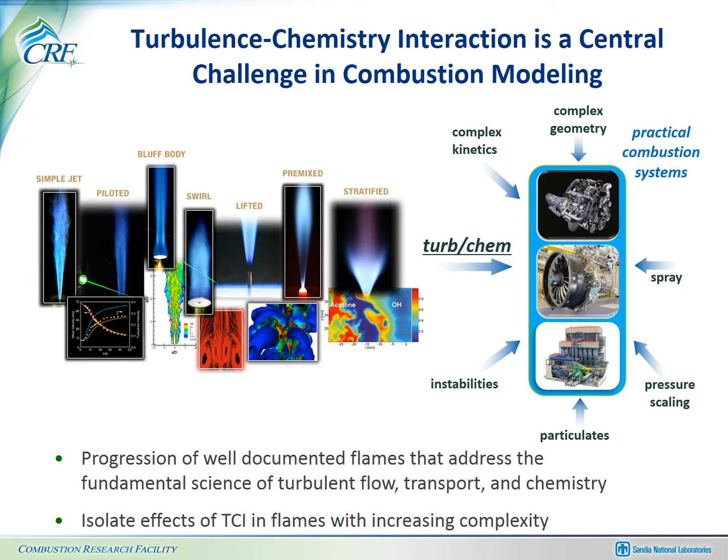I want to start by reminding you that I've never done any work on high pressure combustion, and most of the flames we work on don't really qualify as high Reynolds number, although we try to push the Reynolds number as high as practical in the lab. What we've done is focus on fundamentals of turbulence chemistry interaction in a progression of well-documented flames, looking at the coupling of turbulent flow, molecular transport, and chemistry, trying to isolate the effects of turbulence chemistry interaction in flames of increasing complexity.

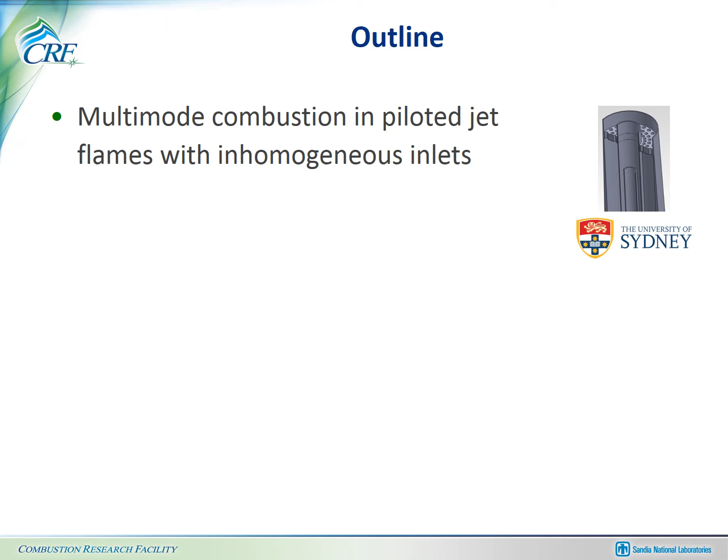In this talk, I'm going to tell you what we've done most recently to make our lives more complicated. The first part covers the investigation of multimode combustion in a piloted jet flame with inhomogeneous inlets. The interesting thing about this burner from Sydney is that within the near field there's a very rapid transition from a stratified premixed mode of combustion to diffusion type flame structure.

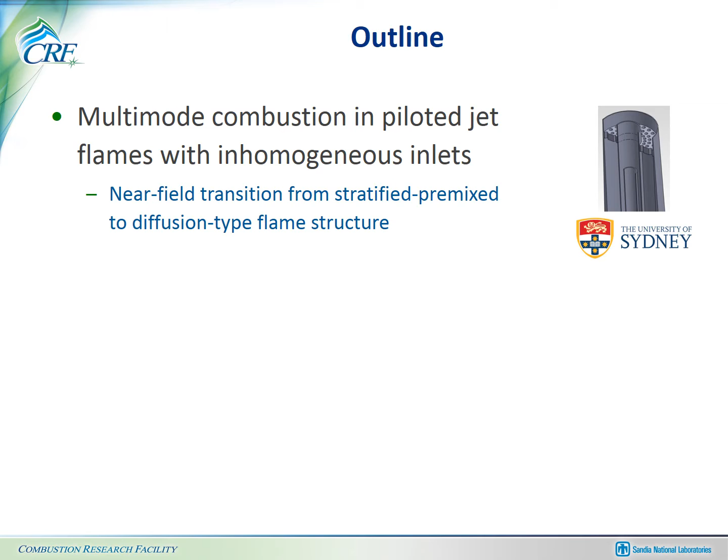The next part of the talk covers two different developments we've been working on in extending Raman scattering to less friendly flames and to a wider range of hydrocarbons. In the last part, I'll give a tip that may be useful for high pressure, high Reynolds number combustion: how to extract the fully resolved scalar variance from under-resolved measurements.

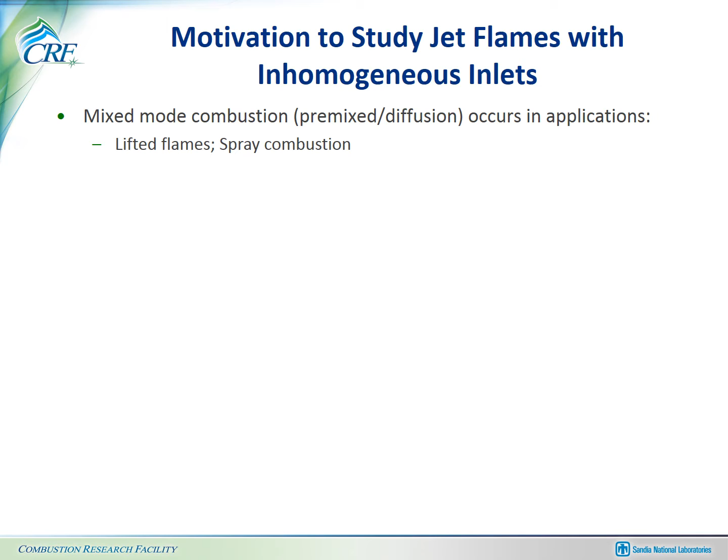The motivation to study these jet flames with inhomogeneous inlets is that mixed mode combustion - combustion with characteristics of both premixed and diffusion flames within the same combustor - occurs frequently in practical applications. Essentially anytime you have a lifted flame or spray combustion, it's partially premixed, and there's a mixed mode flame structure present. An example of a laboratory scale flame showing mixed mode combustion is the DLR model gas turbine combustor.

There's a nice paper from the last symposium from that group combining PIV measurements, OH PLIF in the red, and acetone PLIF in the blue, showing varying degrees of fuel-air mixing moving into the reaction zone in this flame.

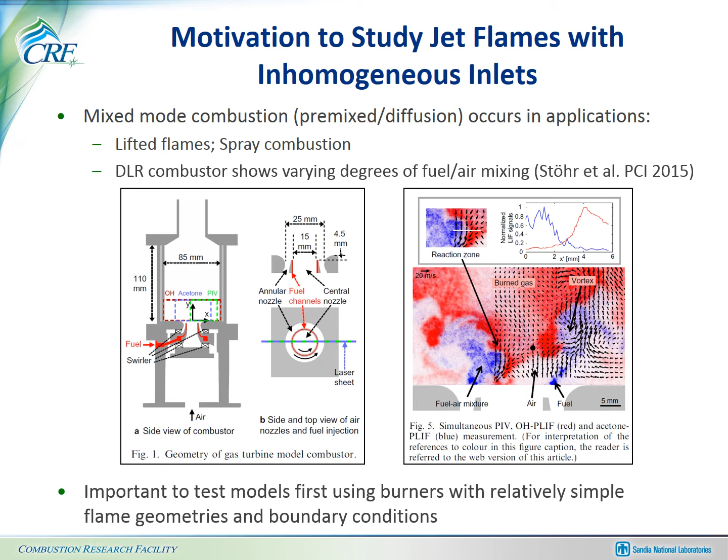The problem with this combustor for modeling is that the boundary conditions and flow field are rather complex. It's important to first test models using burners with relatively simple flame geometries and boundary conditions. This new piloted jet flame burner from Sydney University allows investigation of mixed mode combustion in a burner geometry that's relatively simple and familiar.

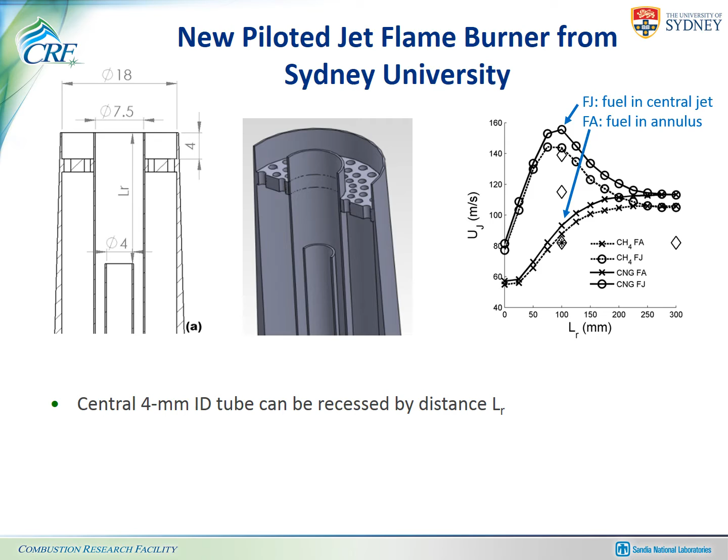What they've done is add a central 4mm inner diameter tube within the main tube that can be recessed by variable distance. The burner can be operated in two configurations: FJ refers to fuel coming through the central tube and air through the annulus, and FA refers to fuel coming through the annulus and air through the central tube.

When fuel is injected through the central tube, there can be an enhancement of flame stability by up to 40% in blow-off velocity if the recess distance is within an optimal range.

There's been quite a bit of work done and already published on a first series of flames with an air-to-fuel ratio of 2 and a stoichiometric pilot burning acetylene, hydrogen, and air, with an adiabatic flame temperature of 2480, significantly higher than methane air.

We've also done, and what I'll present today, is a series of measurements using a stoichiometric pilot with 5 gases to match both the composition and adiabatic equilibrium flame temperature of methane and air.

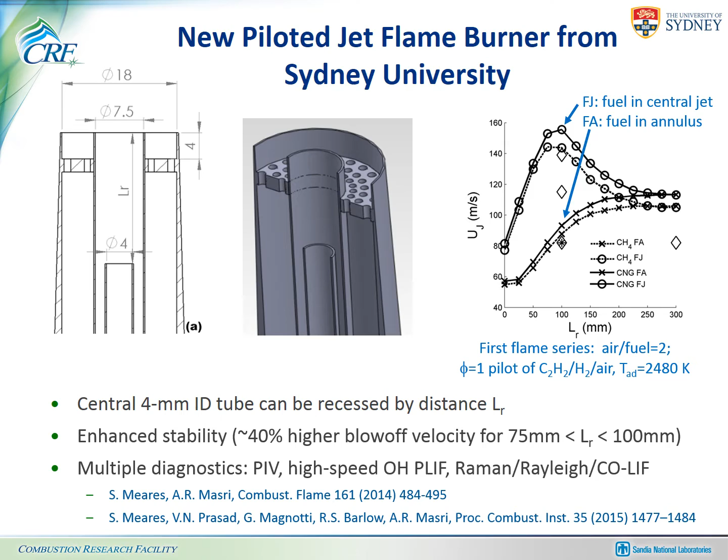But first, I want to remind you of the diagnostics we use. At Sandia, we combine line-imaged Raman scattering, Rayleigh scattering, and CO laser-induced fluorescence with cross-planar OH-LIF imaging. For the Raman and Rayleigh measurements, we combine beams from 4 lasers to deliver about 1.8 joules per pulse total energy.

That allows us to measure temperature and all the major species with good precision and spatial resolution on the order of 100 microns, along a 6 millimeter segment of the beam, letting us measure the state of mixing, progress of reaction, and also gradients in the measured scalars.

The OH cross-planar imaging allows us to determine the local flame normal direction, and from that we can estimate the 3D gradients and dissipation from the 1D measurement. I won't be reporting any information on these 3D measurements today—it'll all be just one-dimensional work.

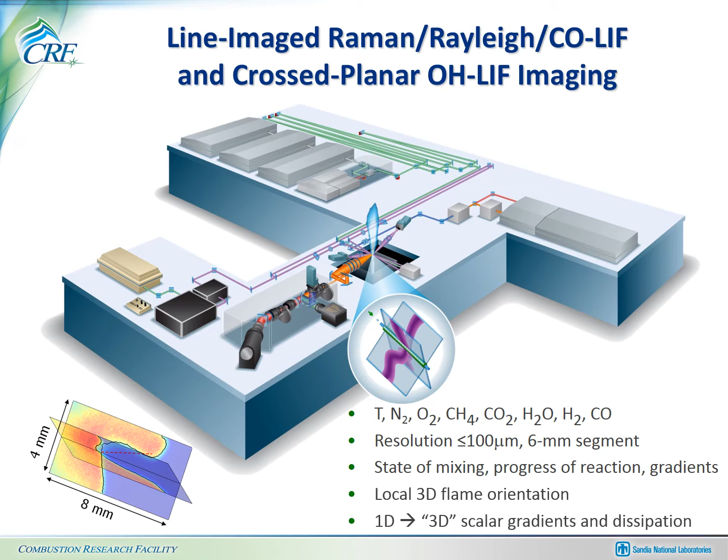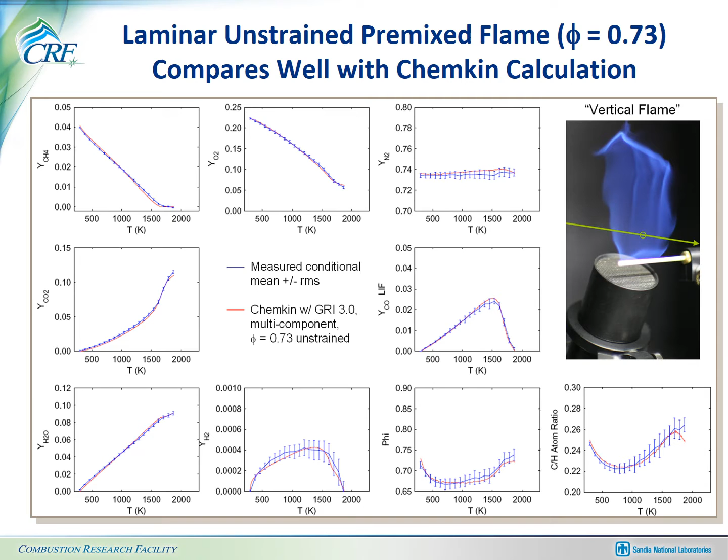When we go through all of our calibration procedures and then go back and measure a simple flame, we can demonstrate that we get very good results. This shows a comparison between Chemkin calculations of a freely propagating premixed flame and our measurements on our best approximation of that type of flame at equivalence ratio of 0.73.

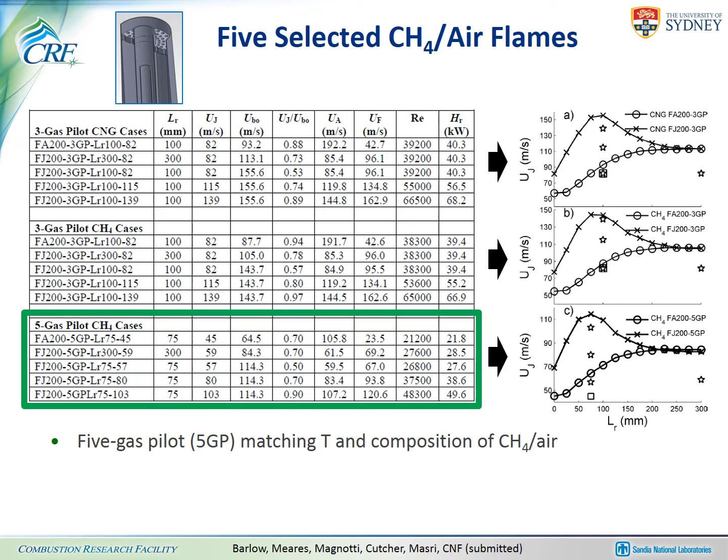This table lists all of the flame conditions that have been measured, including a set of natural gas flames that were used in Sydney, the methane flames that were run at Sandia using the same velocities as those natural gas flames, and both sets of those flames were done with the 3-gas pilot and high adiabatic flame temperature in the pilot. The last group is this 5-gas piloted series of flames measured at Sandia, and within that we have 3 inhomogeneous flames with the FJ configuration and a recess distance of 75 millimeters, at 50, 70, and 90 percent of blow off.

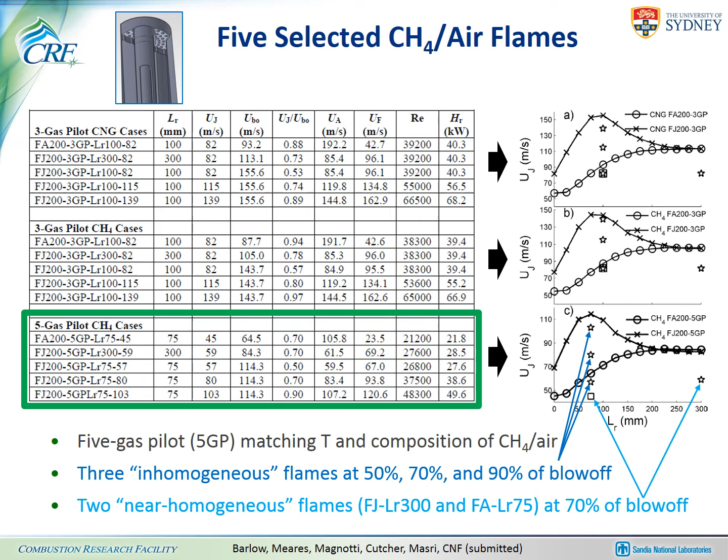There are 2 flames with the other configurations. One is FJ fuel in the central jet, but with a recess distance of 300 millimeters, and this essentially burns like the homogeneous flame. It's not completely homogeneous—there are some fluctuations in mixture fraction at the exit, so we call that near homogeneous. Then there's an FA configuration with a 75 millimeter recess distance, but because the air jet velocity is so high coming out of that small tube, there's very rapid mixing, and the mixture fraction is essentially flat or uniform at the exit, or very close to that. Both of those are at 70% of blow off.

Lots and lots of data. There's just been a large paper submitted to Combustion and Flame.

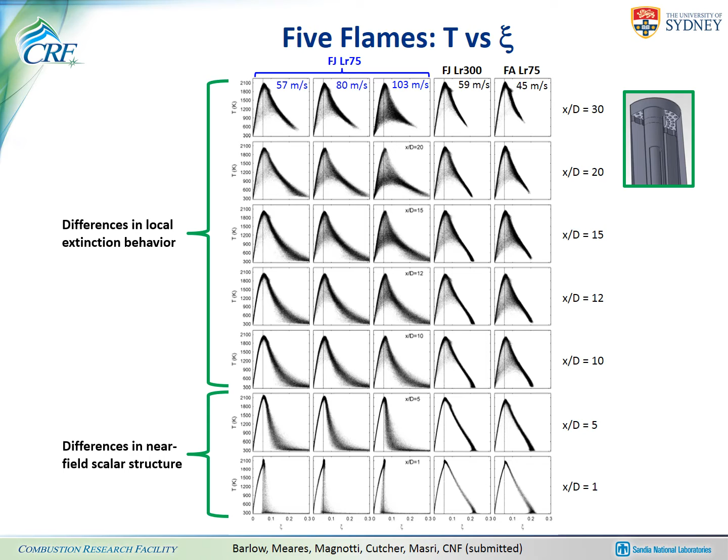In the downstream part, we have differences in the local extinction behavior, and further upstream we have differences in the near field scalar structure. What I want to do for this talk is focus on just 2 flames in the very near field and look at the differences and evolution of flame structure within those 2 flames.

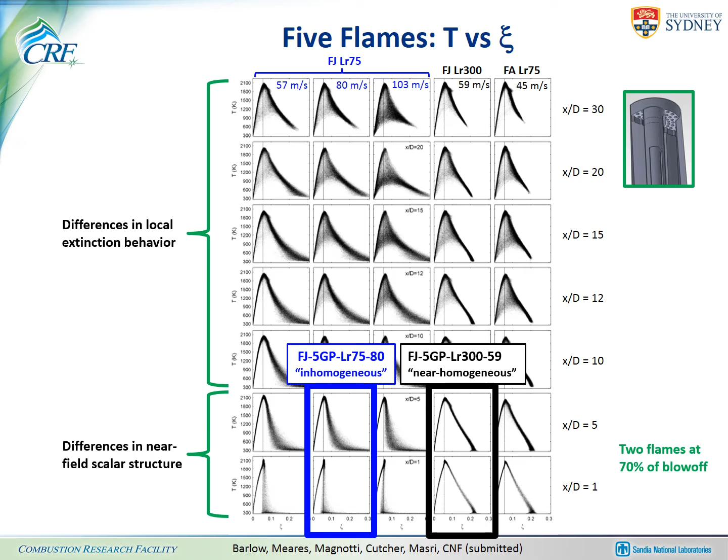These 2 flames are each at 70% of the blow-off velocity, and at 1 diameter downstream of the jet exit they have very similar profiles in temperature, and also very similar profiles in jet exit mean velocity and turbulence intensity once those profiles are normalized by the bulk jet velocity, which is 80 meters per second for the 75 millimeter recess distance case, and 59 meters per second for the 300 millimeter recess distance case.

But these 2 flames have very different exit profiles, or near exit profiles, in the mixture fraction, shown here at 1 diameter downstream. For mixture fraction, we're using Bilger's definition and defining unity as the condition with pure methane, so the stoichiometric mixture fraction is 0.055.

In the inhomogeneous case, we have a very peaked profile in the mean mixture fraction, whereas in the homogeneous case it's nearly flat. There is some asymmetry from side to side, and this is due to a slight offset in the centering of the central tube, which is difficult to center perfectly in these flames.

This asymmetry doesn't really affect our interpretation of the flame structure. The inhomogeneous flame also has minor asymmetry—you can see there's a slight dip to the leaner mixture fraction on the left side compared to the right side of the profile, but the symmetry is really pretty good.

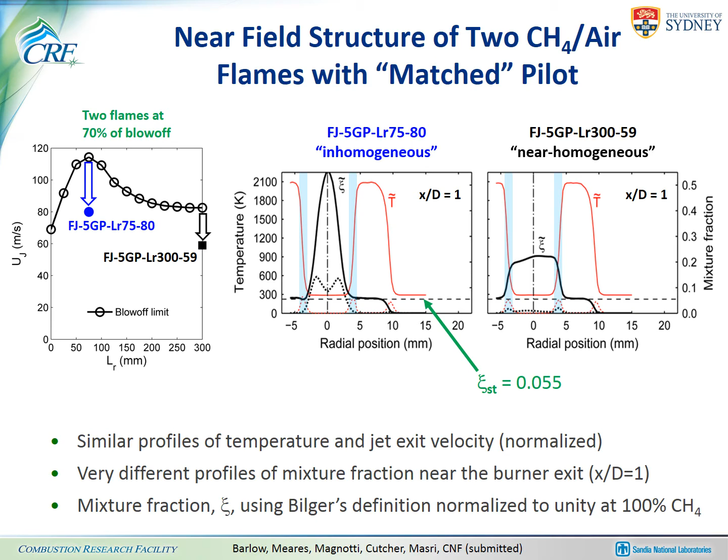Now let's go back to the scatter plots of temperature versus mixture fraction. The first thing I want to show you is that there are some points affected by fluorescence interference, but these are a small fraction of the samples, and fluorescence interference in these flames is a minor problem. What we really want to focus on is the change in mixture fraction across the reaction zone.

So the change in mixture fraction divided by change in temperature: in the inhomogeneous flame there's a nearly vertical trajectory. This looks like premixed combustion or stratified premixed combustion, and most of the data points are actually along the floor here, going up to quite high mixture fractions, all the way up to about 0.7 on an instantaneous basis.

Then for this near-homogeneous case, there's a somewhat smaller variation within the mixture fraction samples across the interior of the jet, the cold samples, and then even smaller fluctuations in the mixture fraction entering the flame zone and lifting off the temperature floor.

Then the dependence of temperature on mixture fraction is nearly linear, and that slope is about minus 10 to the minus fourth inverse Kelvin. As we go downstream, in the near-homogeneous case, the slope is essentially the same, looks really similar. In the inhomogeneous case, we're rapidly starting to pull into richer samples entering this reaction zone.

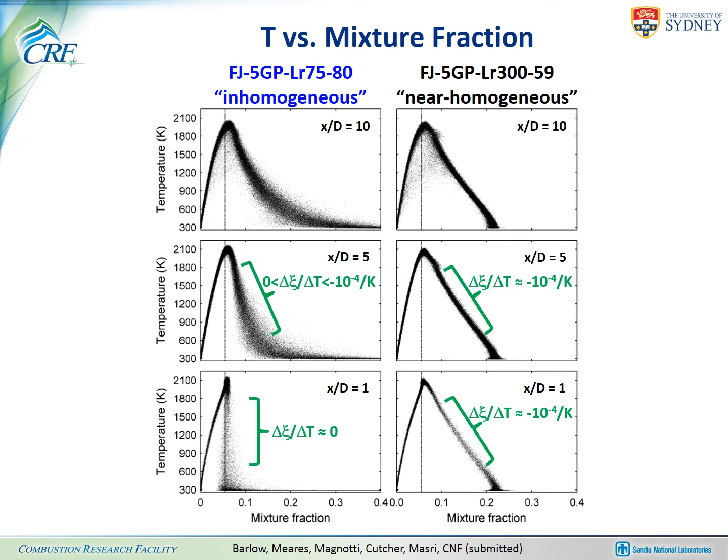Here we compare scatter plots of species mass fraction versus mixture fraction in the two flames, with samples color-coded for temperatures above 1400 Kelvin, so we can see what mixture fractions and samples are moving into the reaction zone. In the inhomogeneous case, the scatter plots reinforce the picture of a stratified premixed combustion mode going on with near-stoichiometric conditions, both lean and rich, moving toward the condition of the pilot.

If we move further downstream, we again see that there's a very rapid pulling away toward richer samples of the mixture fractions that are moving into the reaction zone.

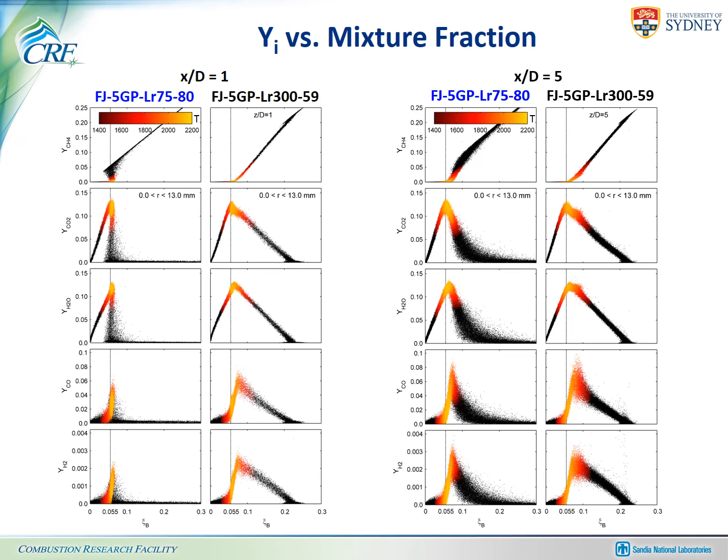Now what we want to do is isolate the flame structure on an instantaneous basis using our line measurements. Here we compare instantaneous temperature profiles from each of the two flames, 25 shots in each flame, and each profile has been shifted to align the center temperature of 1200 Kelvin at the origin.

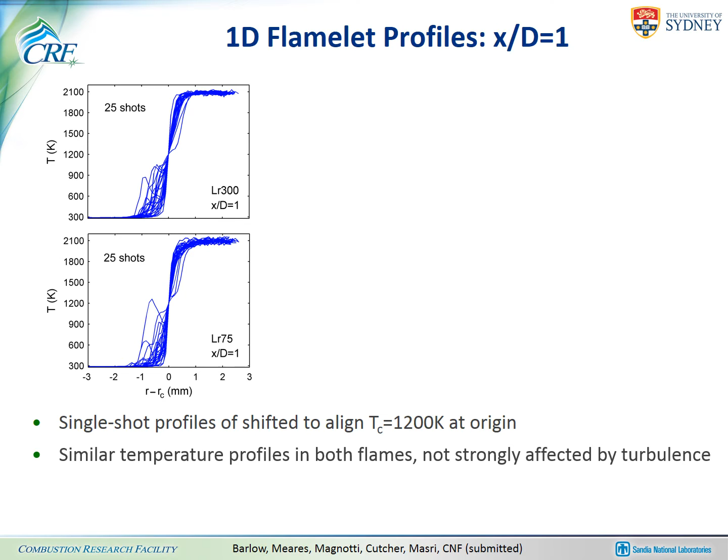What we find is that despite the large difference in mixture fraction profiles for these flames, the temperature profiles are quite similar. At this near-exit location, they're not very strongly affected by turbulence; the fluctuations are limited really to the cool half of the flame for the most part. These really look like flamelet-type profiles.

If we look at the mixture fraction, then in the near-homogeneous flame, there's a very strong correlation between mixture fraction and temperature going through the reaction zone, so aligning on temperature also aligns on mixture fraction, with a value in the center of the flame of about 0.13, outside the flammability limit.

Then looking at the inhomogeneous case, we find that in the center of the reaction zone there are fluctuations in mixture fraction, but those are all within the flammability limits. We see again that we've got samples coming from the lean side and from the rich side of stoichiometric, burning in a stratified combustion mode toward the stoichiometric or slightly higher than stoichiometric conditions as measured in the pilot.

We can also look at the scalar dissipation, and here we're just looking at the radial contribution to scalar dissipation. There's a caveat that we haven't measured the dissipation scales in the near field here, but based on previous work and similar flames, we expect that we're under-resolved, so we're only using these dissipation measurements for qualitative comparisons.

What we find is that in the near-homogeneous case, we have high dissipation in the middle of the reaction zone, and in the inhomogeneous case, we've confirmed that dissipation levels are very low within the reaction zone.

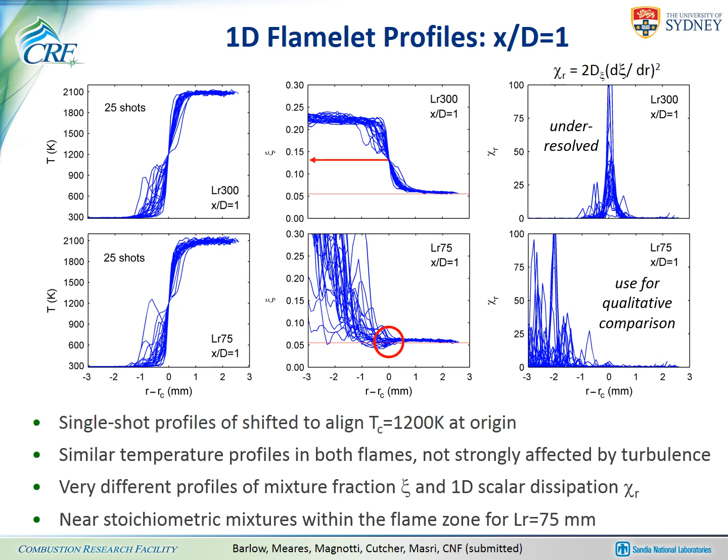The previous slide showed just 25 realizations from each flame, and here we're comparing histograms from 500 shots coming from each flame. We confirm that the mixture fraction at 1200 Kelvin in the middle of the reaction zone in the inhomogeneous case with the 75 millimeter recess distance is centered near the stoichiometric condition and has both lean and rich of that stoichiometric condition.

Whereas in the near homogeneous flame, the mixture fraction value in the middle of the reaction zone at 1200 Kelvin is too rich to burn.

Now let's look over at the scalar dissipation. Here we see a distribution in scalar dissipation that is high within the flame for the near homogeneous case, and very low dissipation for the inhomogeneous case. Essentially all of the samples, or nearly all of the samples, are in the smallest bin centered on 0.

Now what we want to do is look at the statistics of this flame structure metric that we mentioned in the scatter plots of temperature, which is the change in mixture fraction divided by the change in temperature. We're using this macroscopic measurement across 1000 Kelvin because measuring the local mixture fraction dissipation in a premixed flame is sort of beyond what we can really do with our precision and resolution in these measurements. So this is sort of a macroscopic metric of the combustion mode, or the flame structure.

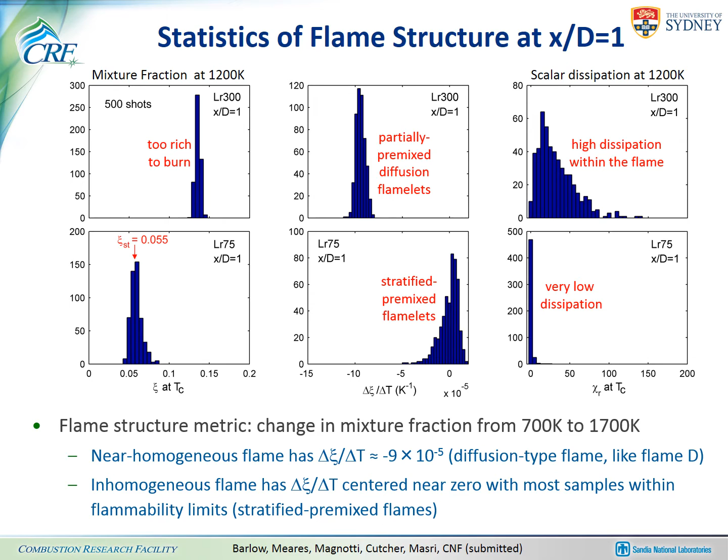Moving to 5 exit diameters downstream, there's obviously more turbulent fluctuation in these instantaneous profiles. The scalar dissipation in the near homogeneous case is significantly reduced already from what we saw at 1 diameter. And in the inhomogeneous flame, we're seeing a few intermittent high values of dissipation that correspond to these intermittent high gradients in the mixture fraction that's moving into the reaction zone.

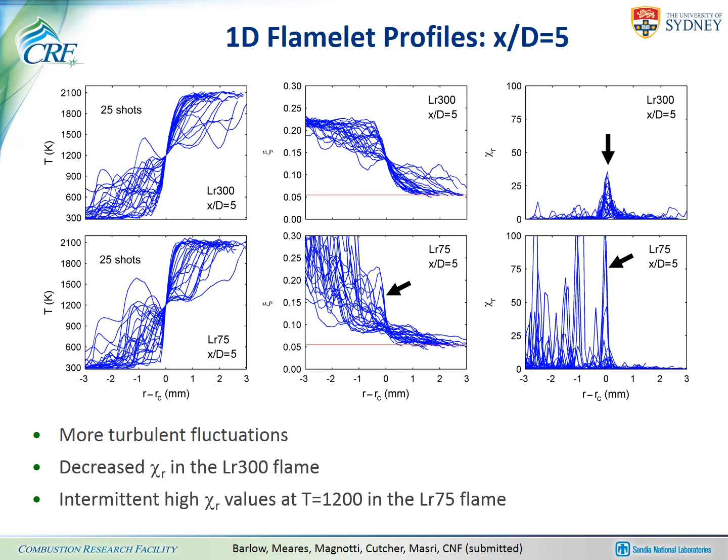The histograms at x over D of 5 show that there's essentially no change in the LR300 case in the mixture fraction at 1200 K. But there's been a shift in the mixture fraction in the LR75 case over to something that's at the edge of the rich flammability limit, about 0.095 or so equivalence ratio, or mixture fraction.

In terms of the scalar dissipation, we see that there's a lower dissipation in the LR300 case compared to that at x over D of 1. And in the LR75 flame, we're starting to see some high values, a few high values of the scalar dissipation.

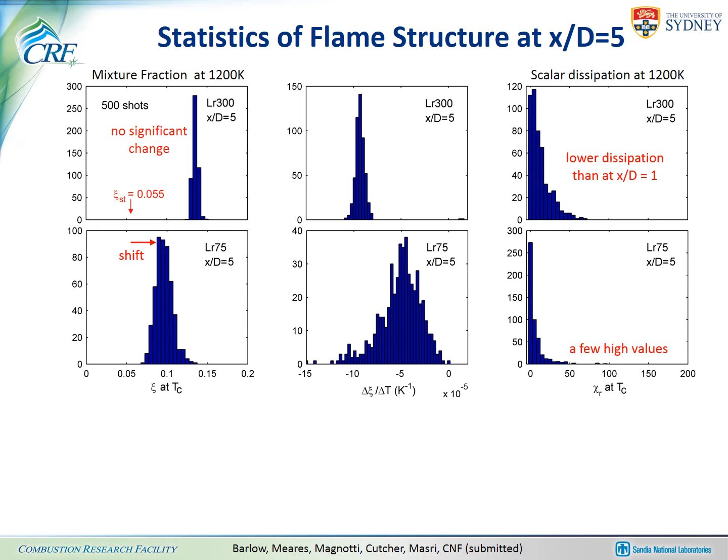Considering the flame structure metric, in the LR300 case, we're still dealing with the same values, or same range of values that correspond to partially premixed diffusion flamelets. But now we have, in the LR75 case, a very broad distribution that goes all the way from the 0 premixed value up to values, or in magnitude, that are larger than what we find in the homogeneous or near homogeneous flame.

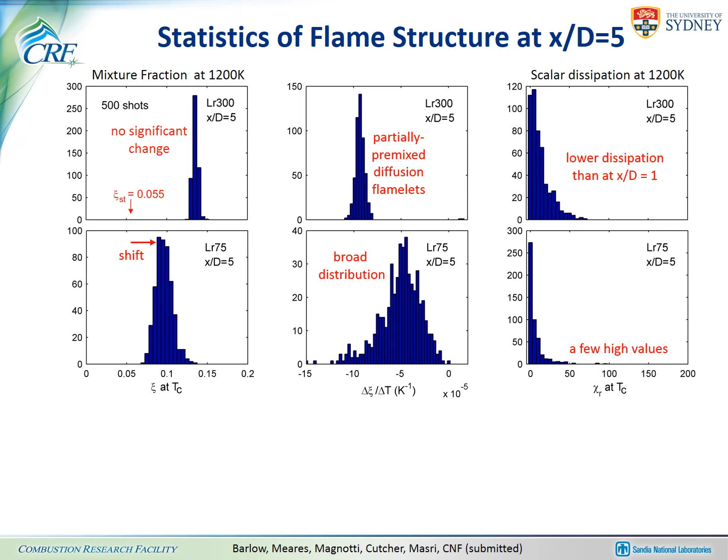So what we're seeing is that we're in the middle of a rapid transition from stratified premix mode of combustion toward a premixed or partially premixed diffusion mode of combustion in this LR75 flame.

What we want to do next is to look at how the flame structure changes as the magnitude of this flame structure metric increases. To do that, we're going to coarsely bin our realizations according to the measured flame structure metric for each realization. We're going to include data from the -R side of the flame, which, if you recall, has a slightly richer mean mixture fraction, and a slightly leaner mean mixture fraction, which will give us a bit more information at this end of the distribution.

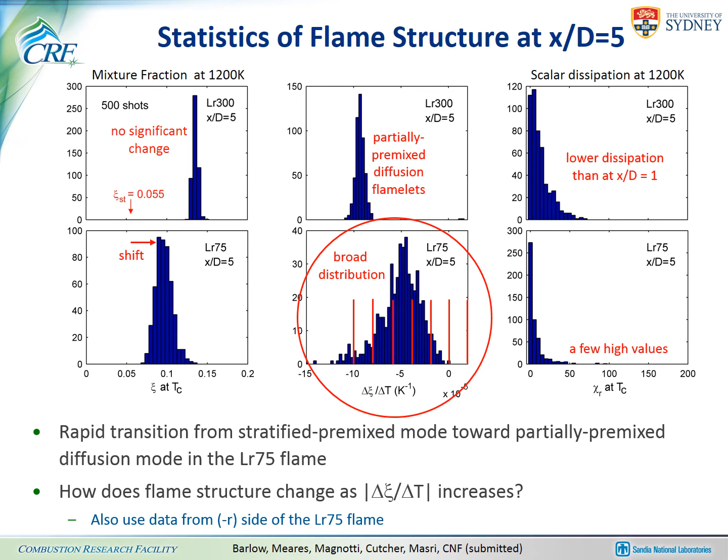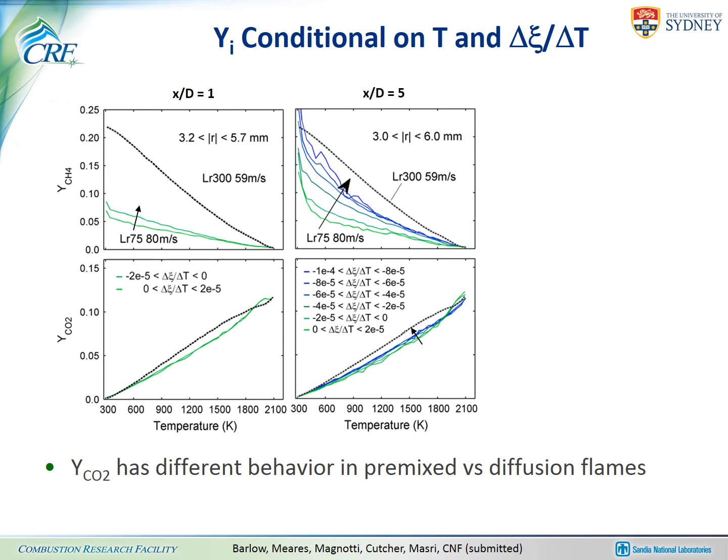At x/D = 5, we're sampling a much broader distribution of the flame structure metric, and what we see is that there's an evolution as we increase the magnitude of that metric, going from the premixed shape of the profile toward the partially premixed diffusion flame type of profile.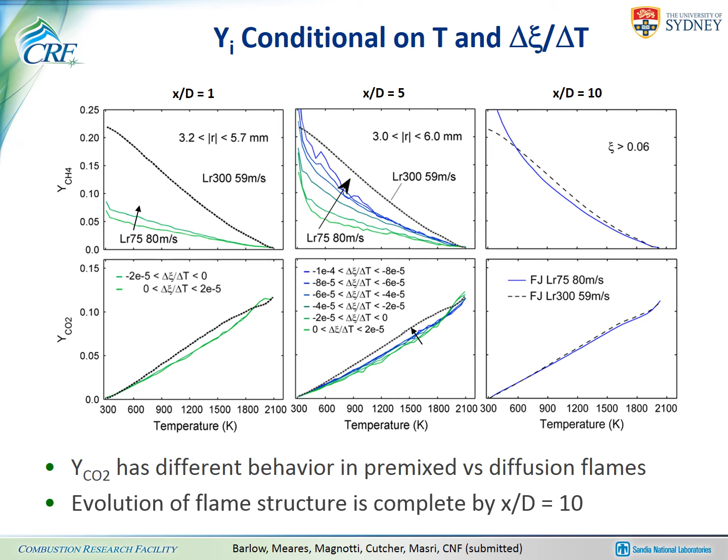As we move farther downstream to 10 diameters, the evolution in flame structure is essentially complete already by 10 diameters. The same sort of thing shows up in the results for water, CO, and hydrogen. In the premix type flame, there's a nearly linear correspondence between water mass fraction and temperature, whereas the curve is slightly concave downward for the diffusion type flame.

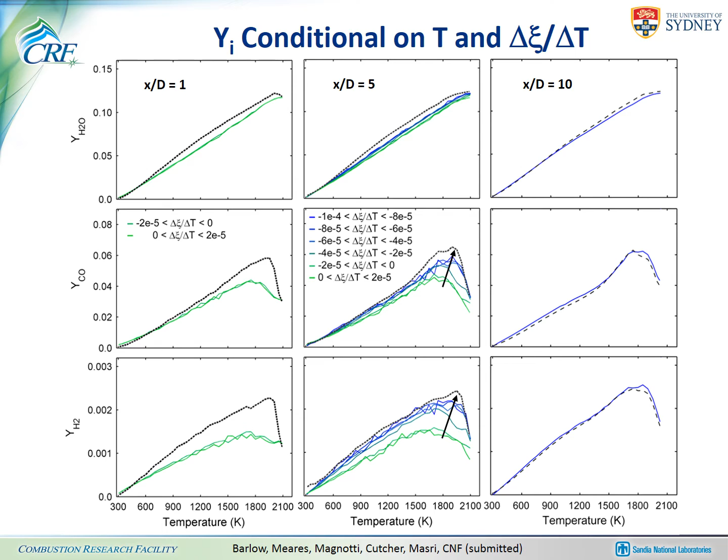As we move toward richer samples within the reaction zone, we go to higher values of the CO peak mass fraction. Again, as we go down to x over D of 10, these profiles are essentially the same, and the evolution in flame structure that happens in this LR75 flame is nearly complete.

We can gain some useful insights by considering strained laminar flame calculations. Sure, the turbulent flames are different—they're unsteady and in a high shear flow rather than an opposed flow—but still we can consider two configurations. One is flow against stoichiometric products, relevant in the near field before the pilot gases have been entrained. The other is flow against air, relevant after the pilot gases have been entrained and somewhat farther downstream from this near field region.

What we've done is vary the fuel side equivalence ratio and consider two strain rates, 100 inverse seconds and 300 inverse seconds. For the case with flow against stoichiometric products, we're limiting the profiles plotted here to temperatures below 2100 Kelvin.

This is similar to what we did with the turbulent flame data to eliminate the influence of the pilot gases on the profiles we're looking at. In the case with flow against air, we're limiting to conditions of mixture fraction greater than 0.05, so it's just the near-stoichiometric and rich conditions plotted here.

What we see is that as we increase the fuel side equivalence ratio in either of these configurations, there's a similar trend in the shape of the CO2 mass fraction profile versus temperature to that which we saw in the turbulent flames.

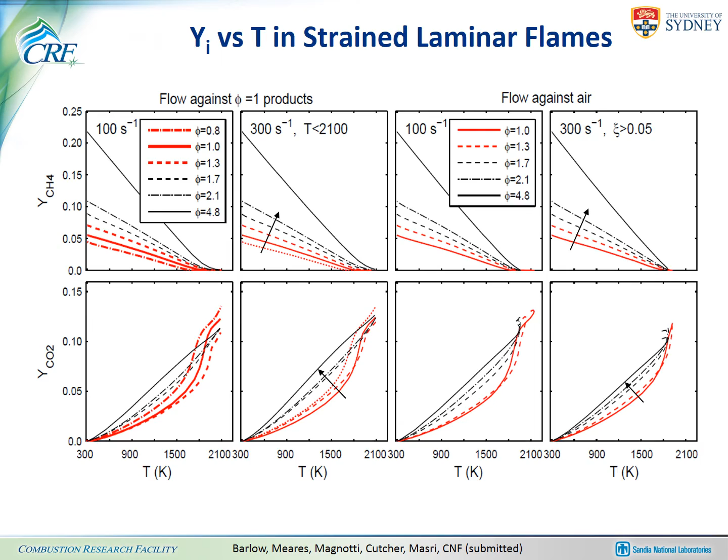We can also gain some insight about the stabilization mechanisms in the turbulent flames by looking at the behavior of the integrated heat release rate versus fuel side equivalence ratio, in the same laminar cases looked at in the previous slide. Let's first start with the configuration of flow against stoichiometric products.

What we see there, in red, is that there's only a very narrow range in fuel side equivalence ratio that gives a high rate of heat release. That quickly decays as you go to richer fuel side equivalence ratios, so that once you get to the point of the 2-to-1 air to methane mixture that is in the near homogeneous flame, the heat release rate is down to 0.

What that means is that the near homogeneous case gets no benefit of heat release within the first few diameters until the product gases from the pilot are fully entrained. But the inhomogeneous flame, which has near stoichiometric reactants in the first few diameters, gets the full benefit of heat release from the stratified premixed reactions that occur in the near field.

Now looking at the case with flow against air, two things pop out. One is that once you get past a fuel side equivalence ratio of about 2, the heat release rate is nearly independent of the fuel side equivalence ratio. Also, as expected, if you increase the strain rate, the heat release rate also goes up until, of course, you get toward extinction.

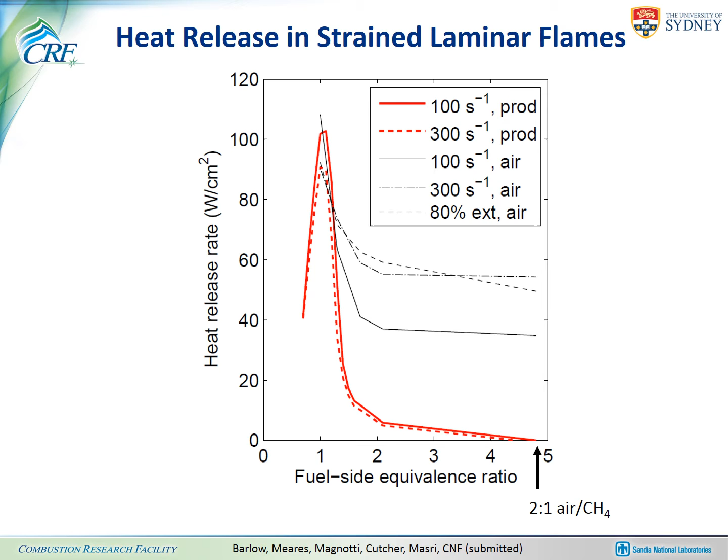Also plotted here, along with the strain rates of 100 and 300 inverse seconds, is the line for 80% of the extinction strain rate, which tracks quite close to the 300 inverse second strain rate. This tells you that you very quickly move from a situation where the stratified premixed flames give more heat release in the near field, to a situation where the strained partially premixed diffusion type flames give more heat release.

Let's look more closely at heat release in these strained laminar flames, considering just the configuration with flow against air. What we have plotted here are profiles of temperature and volumetric heat release rate at the two different strain rates and at the listed values of the fuel side equivalence ratio. Let's first start with the stoichiometric flame.

What we see here at the lower strain rate is that there's quite a separation distance, more than 3 millimeters, between the location of the peak heat release and the location of peak temperature. So this is really an independent premixed flame. There's an extended vertical region in mixture fraction where the temperature is increasing, and this corresponds to the burnout region of the premixed flame.

And if you look at the trajectory of heat release in mixture fraction space, it runs through a loop that starts and finishes at the nominal stoichiometric value.

And this loop is a characteristic of premixed combustion, and it results from differential diffusion within the premixed flame.

Now let's look at the flame with 1.3 equivalence ratio on the fuel side. Here there's a smaller separation distance between the location of peak heat release and the peak temperature, less than 2 millimeters, and no distinct vertical section corresponding to the burnout region. But if you look at the trajectory of the heat release in mixture fraction space, you still have a loop, so this is still essentially an independent premixed flame—a double flame—but that loop closes off a little bit prematurely.

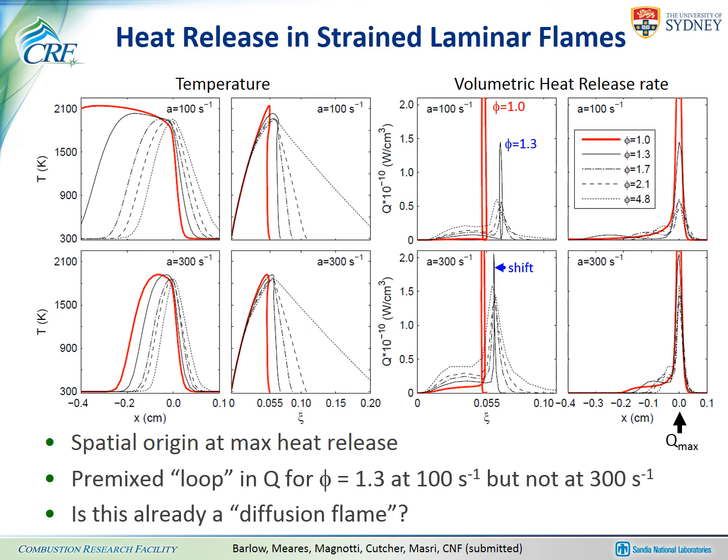Okay, a quick summary on this new piloted burner. It's a new burner from Sydney University that adds a modification of a central tube inside the main tube, and that central tube can be recessed by a variable distance upstream of the exit of the burner in order to vary the degree of fuel-air mixing at the exit.

If we inject fuel through the central tube and air through the annulus around it and recess by an optimal distance, we can enhance flame stability by up to 40% higher blow-off velocity. The mechanism is that there's stratified premix combustion within the first few diameters, and the additional heat release from that augments the effect of the pilot.

Going further downstream, there's a very rapid transition from this stratified premixed mode of combustion to a diffusion type mode of combustion. For that mixed mode combustion regime, we've proposed a metric of the change in mixture fraction divided by the change in temperature across some region of the flame to parameterize the flame structure. We think this should be an interesting test case for models.

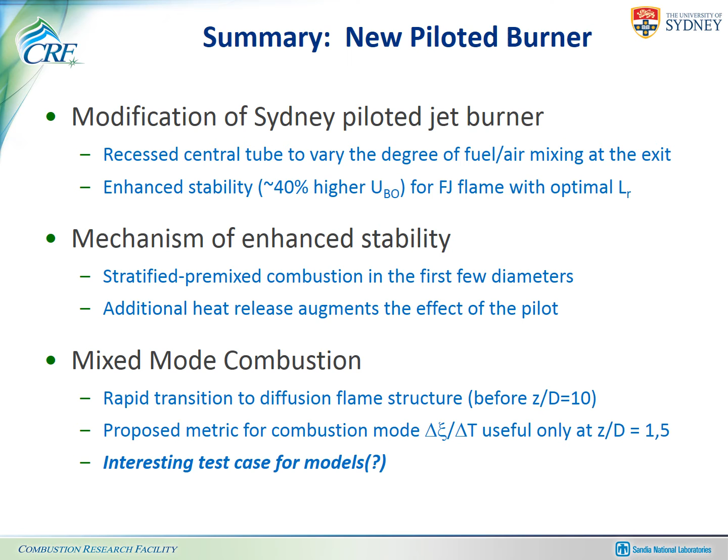So now let's move on to some diagnostics and look at the first of two extensions that we have been working on to bring Raman scattering into less friendly flames and into more complex hydrocarbon fuels.

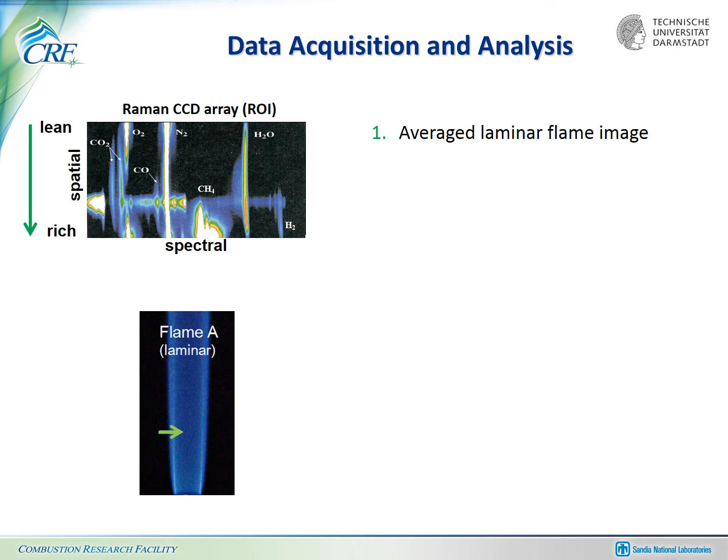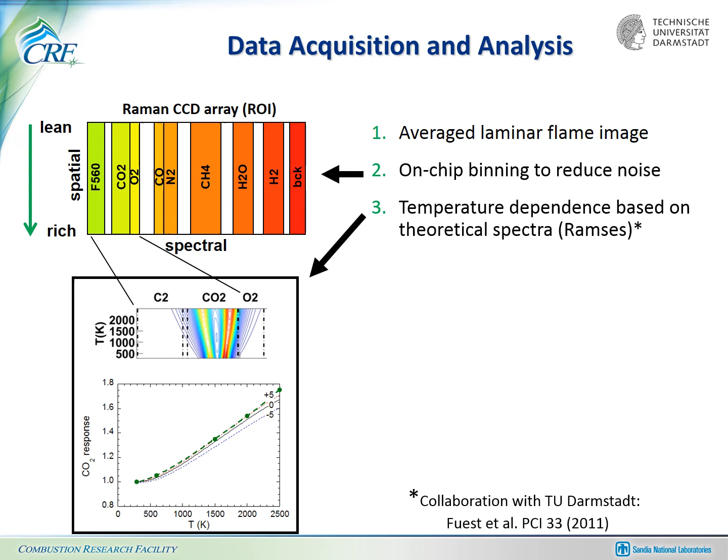Now what we do in the lab to reduce the noise is to bin heavily on chip. Then we rely on theoretical spectra and integration of theoretical Raman spectra, using a code from the University of Darmstadt, to map out tables for the temperature-dependent response of the system to the molecules of interest, and also for crosstalk between the different Raman channels.

Then we solve for species concentrations and mass fractions by iteratively solving a matrix inversion that combines all of these calibration factors and accounts for all of the various crosstalks, including crosstalks from background luminosity and from fluorescence interference.

Dealing with interference in this sort of approach, one defines an interference channel, off on the left side or blue side of what we just saw in the spectrum, the C2 bands near 560 nanometers, and expresses the interference on each of the Raman channels as a temperature-dependent function of that 560 signal.

This is easy to implement in the matrix inversion approach, and it's been successfully applied to a variety of flames that have relatively low levels of fluorescence interference.

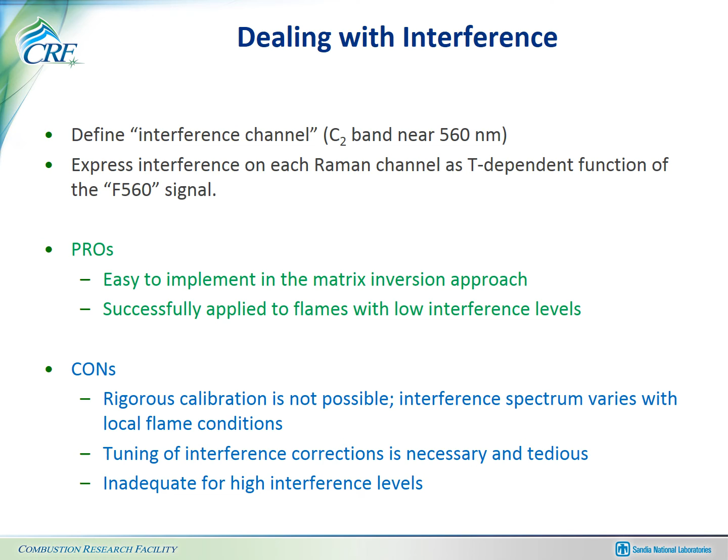On the negative side, it's not possible to rigorously calibrate this sort of approach because the interference spectrum varies with local flame conditions, residence time, and the fuel. That means it's always necessary to tune the interference corrections, and that process can be tedious and a tail-chasing exercise, especially for students that are not so experienced. It's completely inadequate for flames that have very high levels of fluorescence interference.

So to extend Raman scattering to flames with high levels of fluorescence interference, we want to implement a technique of polarization separation and subtraction. This has been done before by several groups. It's conceptually simple: the Raman scattering signals are strongly polarized, while the fluorescence interference and flame luminosity are unpolarized. So if we can simultaneously detect both orthogonal polarizations, we can remove the interference by subtraction. It also reduces the crosstalk corrections, since only the Q branch transitions remain significant.

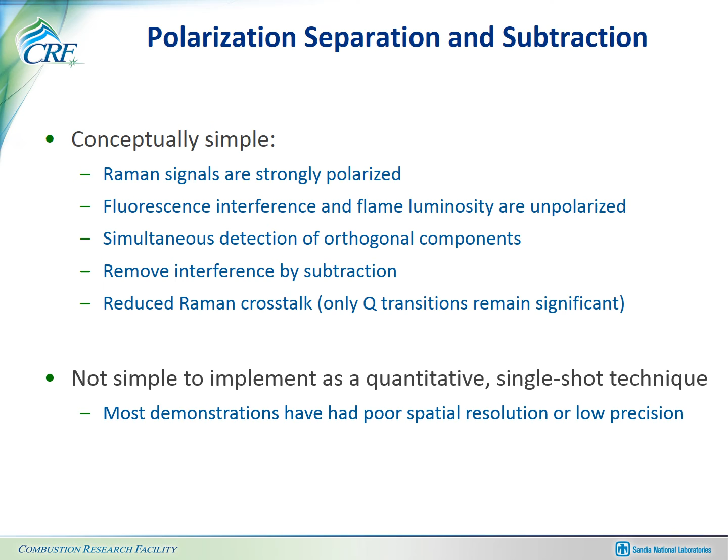However, it's not simple to implement this as a quantitative single-shot technique for turbulent flames. Most demonstrations have had either poor spatial resolution or low precision. What we've done is add a second detection system. The illustration shows 3 cameras, but so far we've just got the Raman and Rayleigh cameras on this second system. On the 2 sides of the table, we've got linear polarizers in each detection system, rotated to be orthogonal to each other.

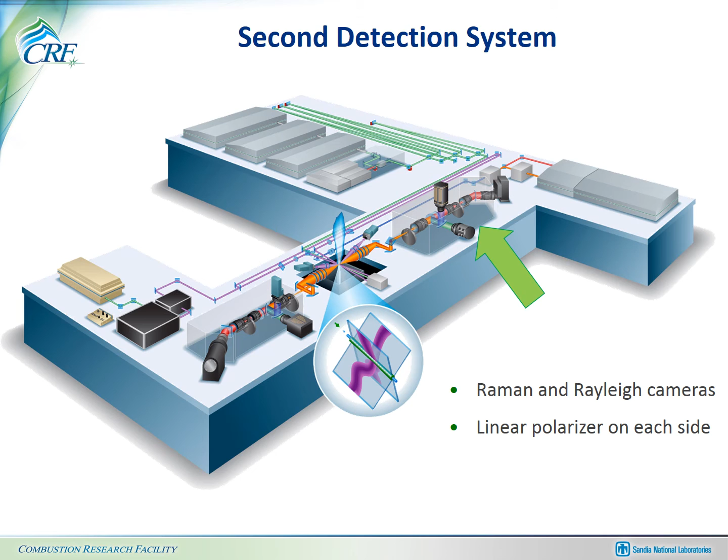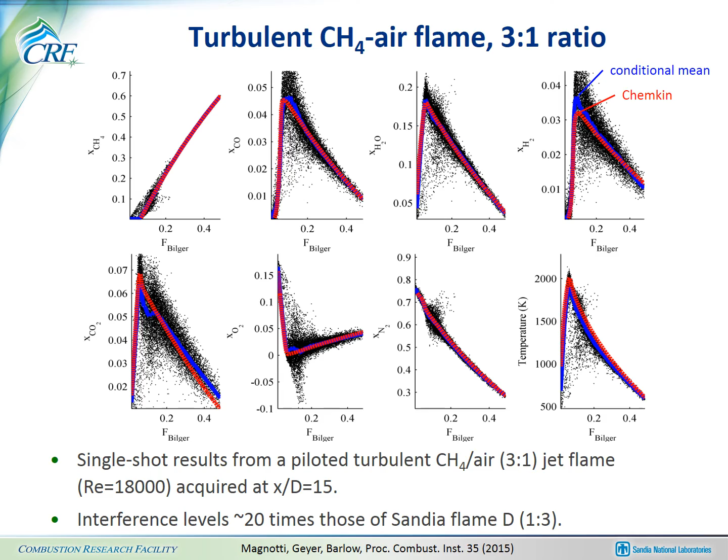Let's move on to the next diagnostic implementation, directed toward simultaneous detection of multiple hydrocarbon species. Our objective is to provide detailed scalar measurements in a series of partially premixed dimethyl ether air jet flames developed by Jonathan Frank to be analogous to the original methane-air piloted series. It runs over a range of Reynolds numbers slightly higher than that original series.

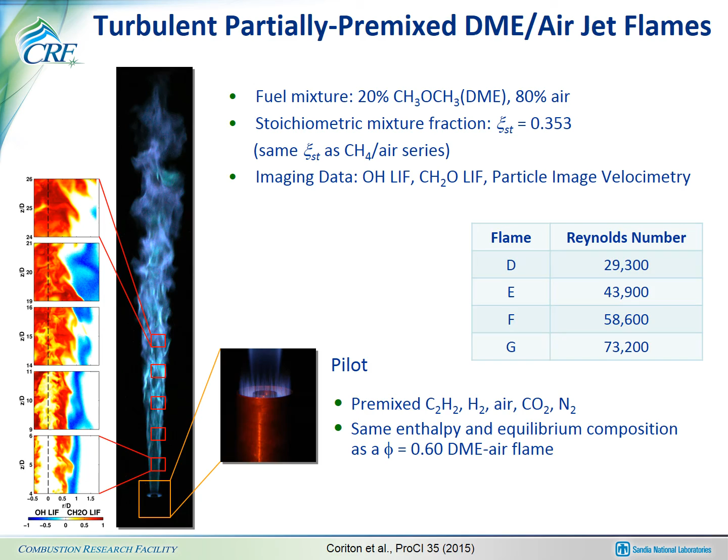Many years ago, Bob Dibble suggested that dimethyl ether would be a good flame for Raman scattering experiments because it's an oxygenated fuel, so it doesn't tend to soot a lot, and it has some conveniences. It's kind of like propane—it comes as a liquid in the bottle, but it has a high enough vapor pressure so that it comes out of the bottle as a gas.

So you don't have to use any liquid pumps or pre-vaporization hardware, and so that should be convenient. Well, that's not the whole story.

We've been working on DME for a while, and the first thing we found out, working with Frederik Fuest, who came as a PhD student from Darmstadt, and collected a bunch of data in laminar flames of a variety of small hydrocarbons, with particular focus on dimethyl ether.

He quickly found out that you have to account for the main stable hydrocarbon intermediates in dimethyl ether flames if you're going to interpret the Raman and Rayleigh signals. The reason is that they come in much higher concentrations, or mole fractions, than you get of intermediates in methane flames, where you can largely ignore them and roll their contribution into the methane signal. Not so with dimethyl ether.

What Frederick did to get around this, since we didn't have spectral information on the separate hydrocarbons with our setup, was to use laminar flames to essentially tabulate the effective cross-sections based on the laminar flame solutions and information he was able to pull out from his own measurements and from the literature on the Raman and Rayleigh cross-sections of the individual hydrocarbons included as intermediates in that calculation.

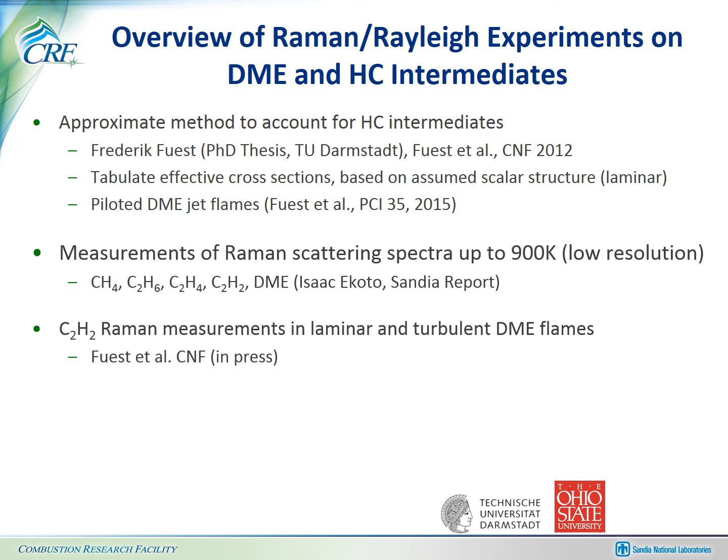At the same time, in parallel, Frederick, and just published recently, was able to work up a Raman scattering interpretation of measurements of acetylene in both laminar and turbulent flames. I'll show you why that's a convenience, or why that's possible, in a couple of slides.

The spectral measurements at low resolution done by Isaac Ekoto turned out to be problematic for our interpretation of signals from turbulent flames. So we had to go back and measure spectra at much higher resolution, up to similar temperatures, in collaboration with people at University of Texas. Most recently, Gaetano Magnotti is working on developing a dual resolution technique for measuring the CH stretch region of the Raman spectrum.

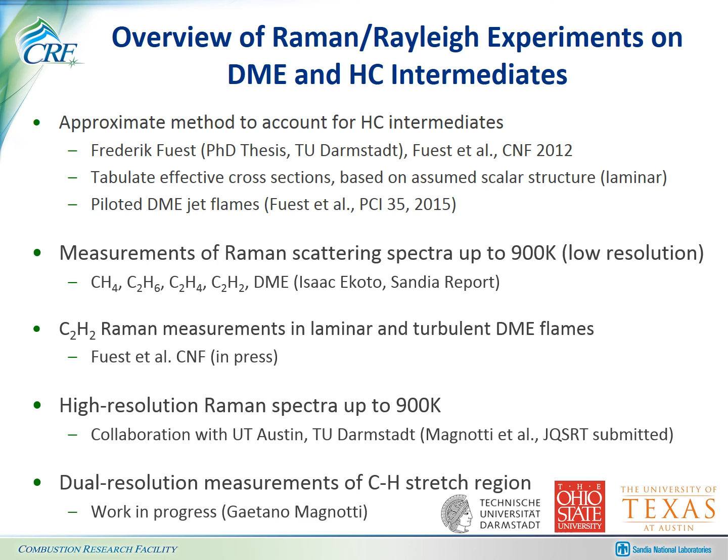First, let's look at some results from Frederik Fuest, from the more recent set of measurements, processed using his assumed flamelet structure approach that he developed as part of his thesis. This shows species mole fractions in the DME flame D, comparing measurements at different downstream locations with laminar flame calculations at two different strain rates, and also with the assumptions of unity Lewis number versus multi-component transport.

Now, the problem with the assumed flamelet structure is that we know it may not be valid in flames that had local extinction, and it may not be as accurate as we'd like even at different locations in the flame, depending on the importance of molecular diffusion. It can be quite important in the near field and less so further downstream, in terms of how mole fractions or mass fractions behave as a function of mixture fraction.

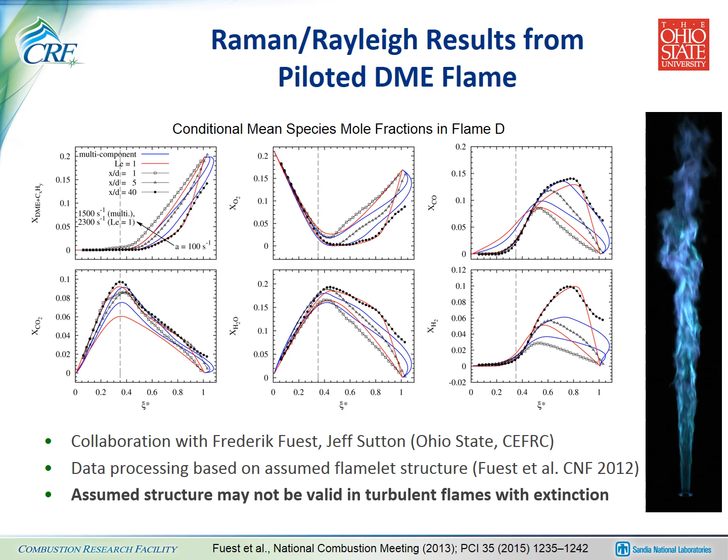These are measured Raman scattering spectra at low spectral resolution from Isaac Ekoto's work. The goal in making these measurements was originally to construct temperature-dependent spectral libraries and then solve for temperature and 12 species simultaneously using the matrix inversion process.

This sort of approach can work with acetylene, and Frederik Fuest has just published some work on this, because the acetylene Raman scattering spectrum is separated from the other hydrocarbons. However, as you can see here, all the hydrocarbons have significant crosstalk or overlap in the CH stretch region of the spectrum, which is over here, and also across the region where we're trying to measure CO2, oxygen, and into the interference region. This overlap with low resolution spectra makes it really problematic to isolate the separate hydrocarbons and measure them accurately.

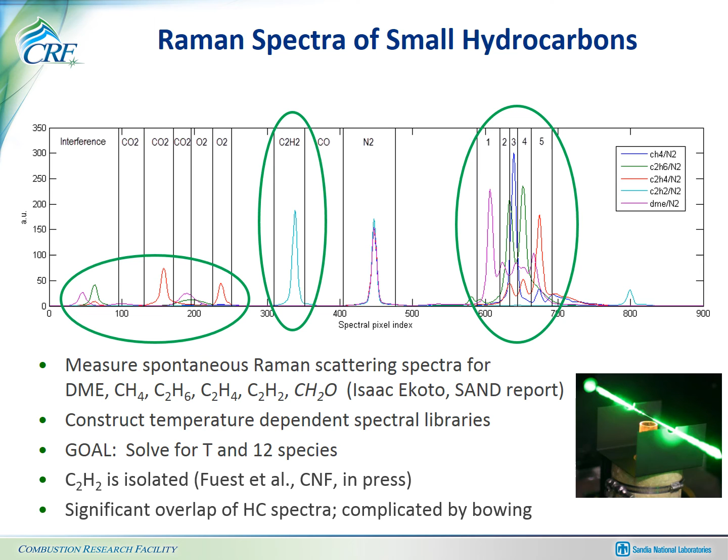So we went through a process of remeasuring all the spectra using a much higher resolution spectrometer in collaboration with Utsav KC and Philip Varghese at University of Texas. This is coming, or is in review for publication.

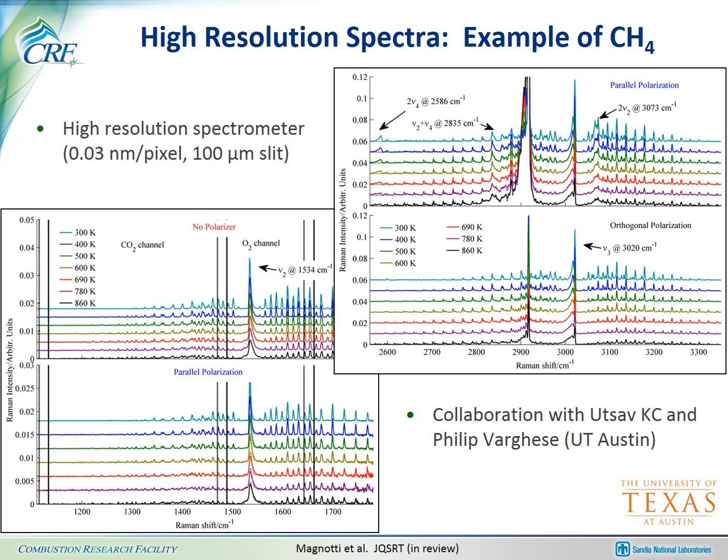What you see here is an example of the spectrum of CH4 at various different temperatures, measured in a heated flow system. These high resolution spectra allow us to build spectral libraries that are more rigorous and more useful outside of just our system.

But there's still significant overlap if we try to resolve those spectra with our original setup and the low spectral resolution that we have there.

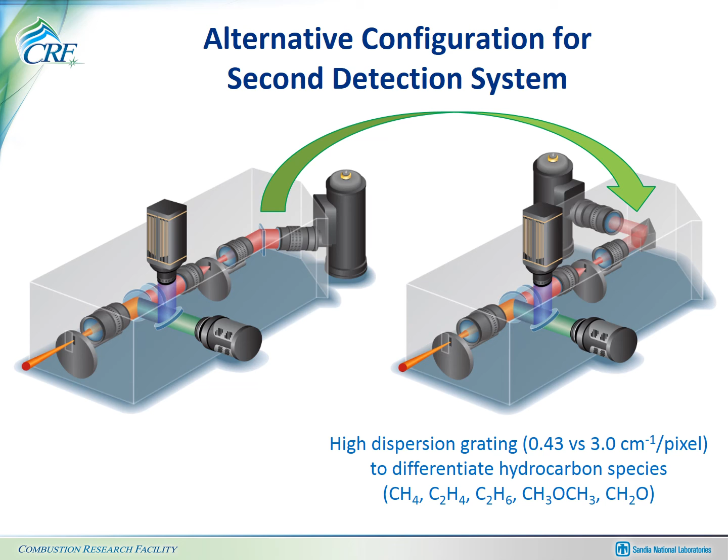So what we realized was possible was that we could use an alternative configuration of this second detection system, where we lift out the grating and final lens that are on the same mount and put in a higher resolution, high dispersion grating and a lens that brings the signal to the chip in a different orientation of the camera.

In this dual resolution Raman scattering setup, we used the new, second detection system to measure the spectrum only in the CH stretch region of the hydrocarbons, and then did all the other species measurements with the original lower resolution setup on the left side of the table.

This slide compares just the CH stretch region with those two different detection systems, and shows there's much better separation of the spectral features in these room temperature spectra when we use the higher dispersion grating in the second detection system.

It's worth pointing out that the width in pixels in both cases is what it is because we're convolving narrow features of the actual Raman spectrum with the fat image of our laser beam. Because the magnification is the same on both sides, that spreading of the spectrum is the same in terms of pixels, but we've spread the CH stretch region across a much larger number of pixels in this higher resolution setup.

Now we also show here a spectral signature for formaldehyde, and the next slide will show some preliminary results on developing Raman scattering for formaldehyde detection.

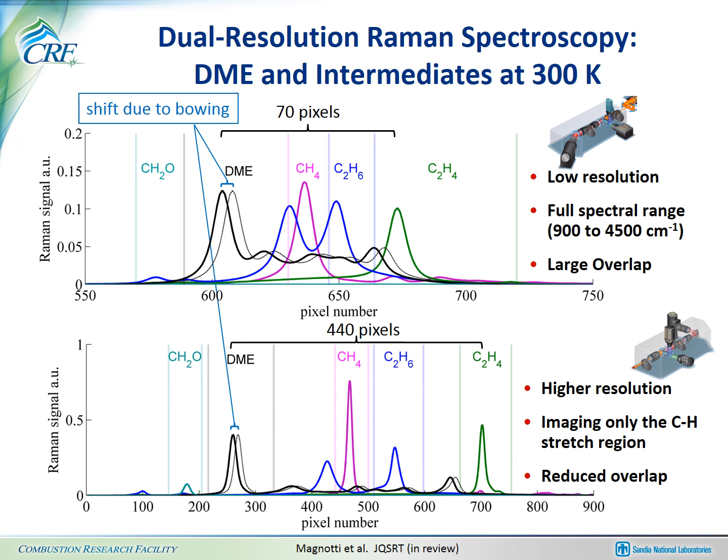That was discovered by accident when we were heating DME at very low flow rates, long residence time, and realized we were starting to see extra spectral signals as we went up in temperature. We were able to identify those signals as methane and formaldehyde, pyrolysis products of the DME coming in contact with the high temperature heating elements.

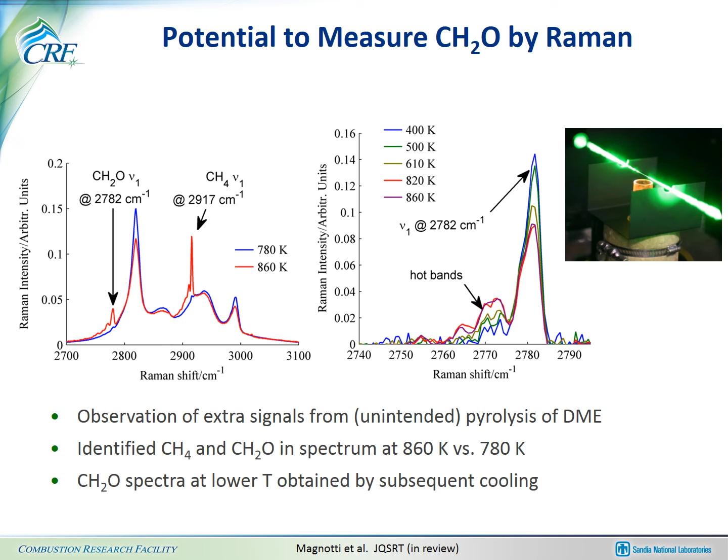We subsequently put in some heat exchangers upstream so we could run the same pyrolysis temperature and residence time, then cool the gases down a bit to get the formaldehyde Raman scattering spectrum over a couple of temperatures. This is really preliminary work - it does not have an absolute calibration, but there's some possibility we'll be able to develop measurements by Raman scattering for formaldehyde, which would be very nice in these flames.

Current work in progress, mostly by Gaetano, is to extrapolate these libraries to higher temperatures beyond what we've actually measured, and test those extrapolations by doing measurements in premixed flames and opposed-flow partially premixed flames, comparing results with calculations from Chemkin. That, of course, opens up the issue of the accuracy of the mechanisms for dimethyl ether and differences among different mechanisms in their predicted species mole fractions.

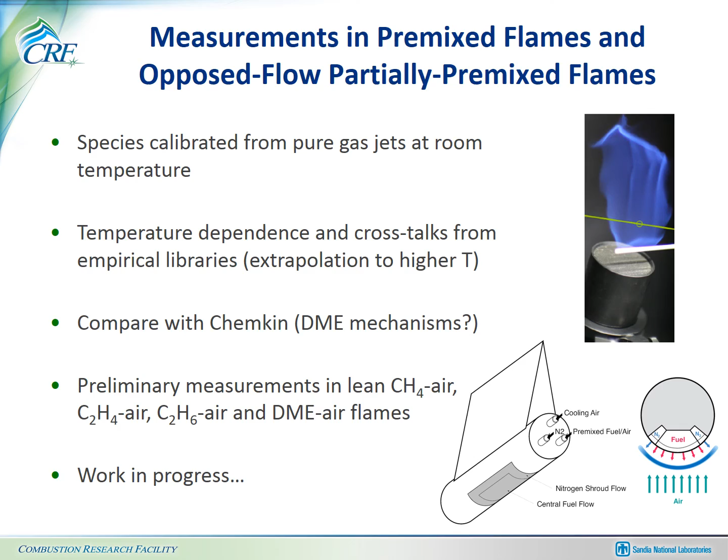Now let's move on quickly to the last part of the talk, which is pretty short and may actually be useful for measurements in high Reynolds number, high pressure flames, where we really don't expect to be able to have the sort of relative spatial resolution that we have in the flames I've just been describing.

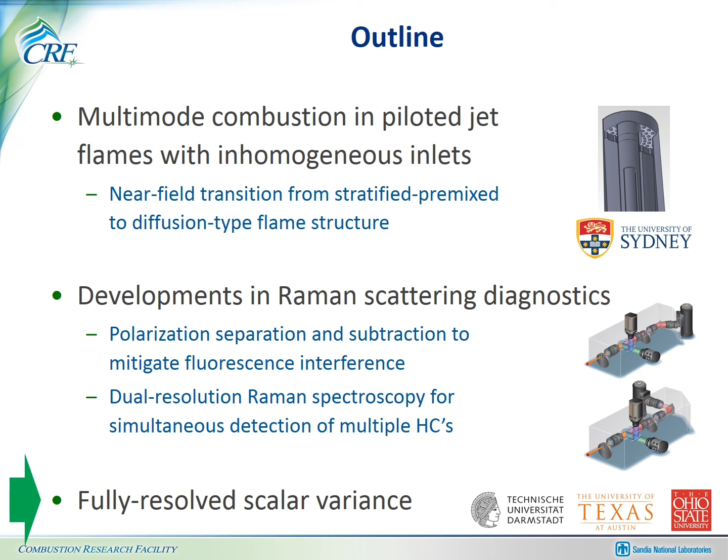I'm going to start this with a short tutorial on length scales and velocity spectra in non-reacting turbulent flows, a classic canonical non-reacting jet flow, and we want to define some terms.

There's the outer scale, which is the half width of the mean velocity profile. Then we're going to do a hypothetical experiment on the centerline axial velocity in the far field using a hot wire. This is a trace of the velocity fluctuation.

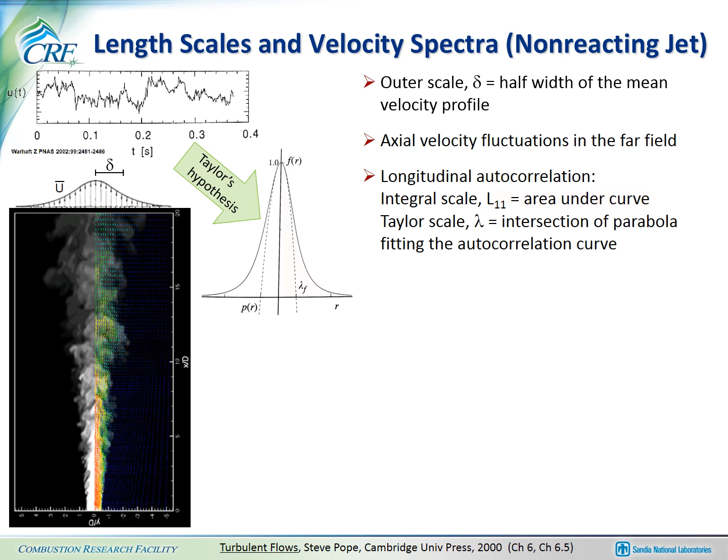If we look at the longitudinal autocorrelation from that time trace, we can define the integral scale, which is the area under the autocorrelation curve, and also the Taylor scale, which is the intersection of a parabola fit to the first part of the autocorrelation curve with the axis.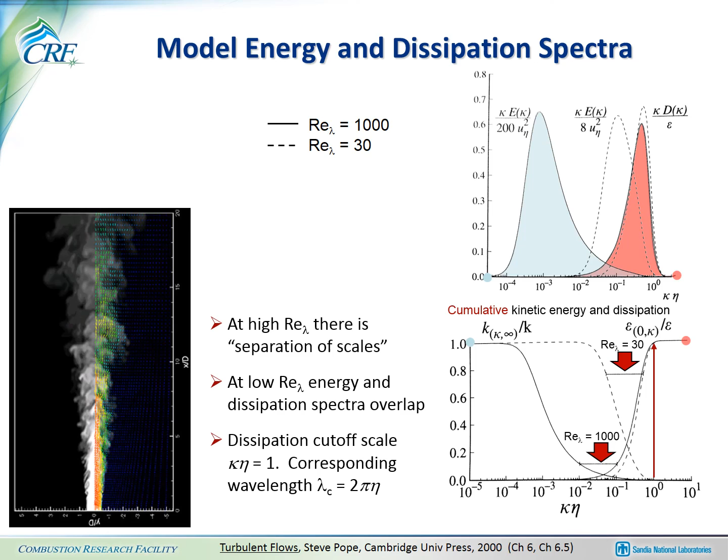Another thing to point out is where the dissipation cutoff is, defined in theory as wave number times the Kolmogorov scale equal to 1. Wave numbers are in radians, so the corresponding cutoff length scale is 2 pi times the Kolmogorov scale.

In gaseous flows, the Schmidt number is near unity, so the Batchelor scale for scalar fluctuations is comparable to the Kolmogorov scale. From non-reacting jet experiments in the centerline far field, there are correlations that allow estimation of the Batchelor scale from the outer scale Reynolds number. Based on work by Guanghua Wang while at the University of Texas in Noel Clemens' group, we know that same correlation works reasonably well in flames, at least in the downstream part, as long as you use the local mean temperature to evaluate properties.

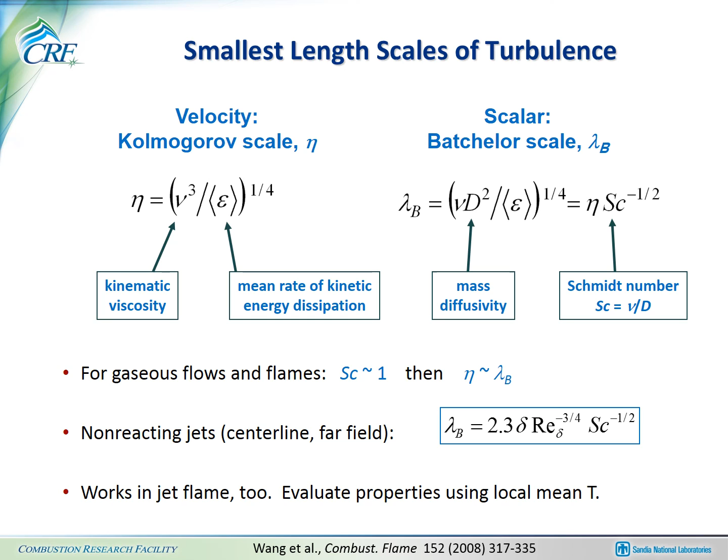The reason for going through that theory was to get to these plots, which appeared in Guanghua Wang's Combustion and Flame paper in 2008. They show the effect of degrading spatial resolution on measured temperature variance and thermal dissipation, based on theory and two experiments: one from Mi and Nathan on non-reacting passive scalar mixing, and one from Guanghua, who applied high repetition rate Rayleigh measurements of temperature in the DLR-A flame at various downstream locations on the centerline.

What we see first is good agreement between theory and measurements for a Taylor Reynolds number of 55. In the passive scalar mixing experiments, there's good agreement with their quoted Taylor-Reynolds number of 180 between the measurements and theory.

In both cases, if we consider relative resolution such that a value of 1 means you're fully resolving the thermal dissipation spectrum, then as you degrade that resolution, the dissipation measurement degrades very rapidly, whereas the variance measurement doesn't degrade so quickly. The higher the Reynolds number, the better your scale separation, and the more quickly you lose the dissipation measurement while still preserving the variance measurement.

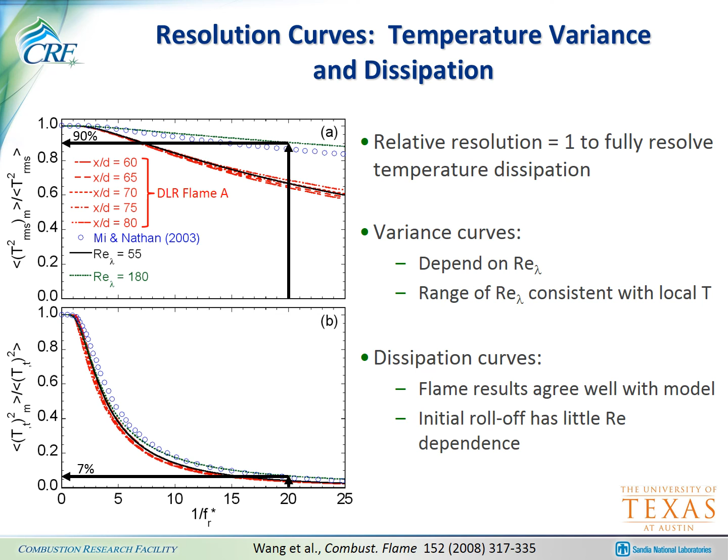That brings us to the punchline on how to estimate the fully resolved scalar variance from under-resolved measurements. This might be useful for the high Reynolds number, high pressure experiments people here are interested in. This comes from about 10 years ago in work in the piloted flame series, where we looked at the mean and variance of mixture fraction and applied successive spatial filtering to the variance, discovering it degraded linearly, or nearly linearly, as filter width increased—allowing extrapolation back to a zero filter width and estimation of the fully resolved scalar variance.